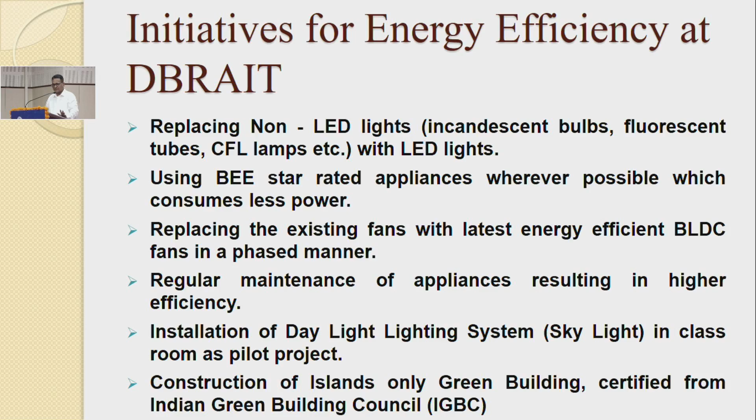And another thing is we have constructed a building, the first green building, awarded by IGBC, Indian Green Building Council. There you will get all natural light. Airflow is there, air circulation is there. We have not installed a single air conditioner there. With the help of fans, we are comfortable in the classroom. Next.

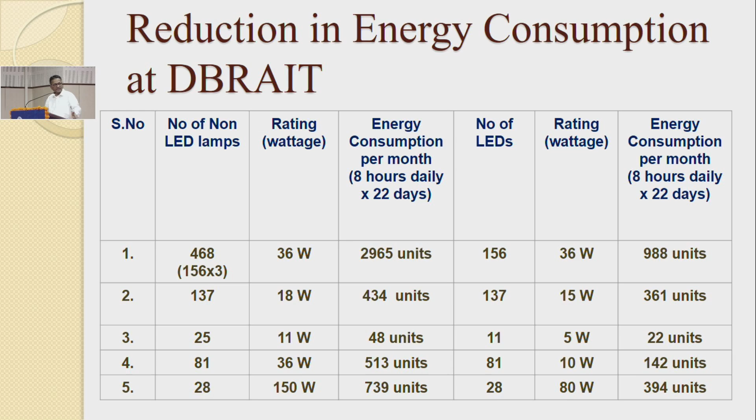This table shows reduction in energy consumption at DBRAIT. So this many lamps we replaced with LED lamps. Next. So we have replaced altogether 936 lamps with LED lamps, and total saving per month in energy consumption is 6,317 units. If we multiply with the tariff rate, we are saving 90,000 plus amount per month. Next.

Solar panels. In all our buildings, wherever the structure is supportive, we installed 4 solar panels, and 2 panels are under installation in the Mechanical Building. Next. Yes, this is the calculation, sir. Energy generated through solar panels. I have taken the readings of 4 months, March to June,

and through solar panels we have generated this many units of energy, and our institute consumption I have noted down. You may find we are almost self-sufficient to produce energy, but these panels were installed by a private party, so this benefit we are not getting. Later, if we install our own panels, we will be self-sufficient in energy also.

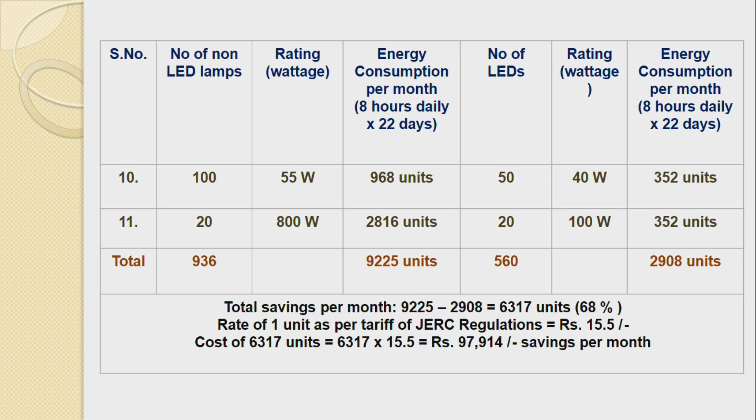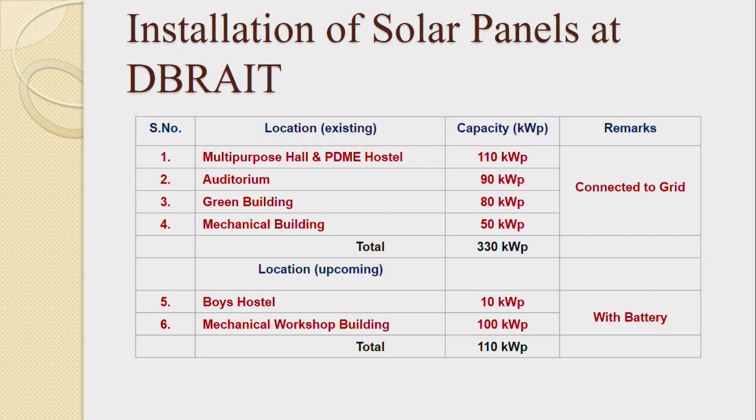Secondly, there is a 330 kilowatt rooftop solar plant, I think, sir, which is generating around 6,000 units per month, saving around a lakh rupees of bill. Yes, sir, around 97. Is it meeting 100% of the power of your whole institute? The monthly consumption of the whole DBRAIT institute is only around 19,000. Next slide. This one, 19,000.

So only 18,000 units are consumed by DBRAIT per month in total, excluding residential, sir. Hostel is included in this figure, workshop, academic classrooms, all included. Everything is included because that data we get from the electricity bill, sir. Okay, that is very good.

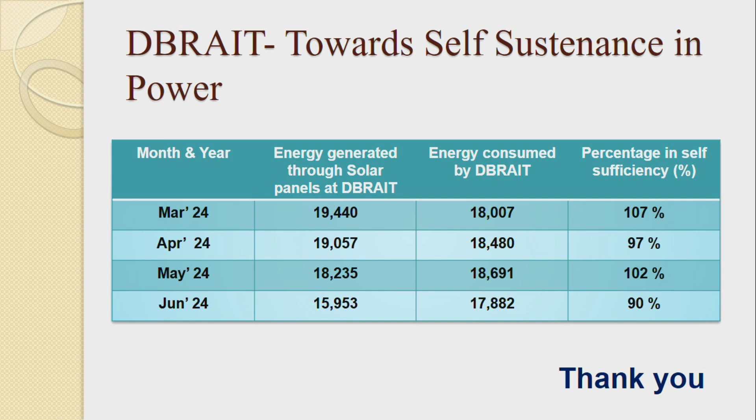If you could give us some data sometime regarding the total saving vis-a-vis earlier consumption and after your energy efficiency measures. Yes, sir. Thank you. And we'll calculate, sir, the per student energy consumption you mentioned, and we will see what it was earlier. Thank you, sir.

After classes are over, all the students leave like that, lights are on, ACs are on. You can't have any centralized control. Nowadays CCTV is there. We have installed CCTV. Through CCTV also, that is one of the ways. If you made the connection like that, we can control from the CCTV room also. After seeing nobody is there, we can switch off. Yes, that's a good suggestion.

Yes, you are telling that a lot of energy gets wasted because even when the classes are over, the lights are on. Initially we have installed a moving sensor in one of the classrooms as a pilot project. So your suggestion is also good. If the person at CCTV is seeing all the things, he can control from the CCTV room itself. Yes. Thank you, sir.

Good suggestion. Students, I am inviting electrical students at least. Mechanical, electrical students are there. I am within the time frame, na, Sajita? Exceeded. Okay. Thank you. Thanks a lot. Thank you, sir. Shankar sir, your talk has set the tone for the event. Thank you very much, sir.

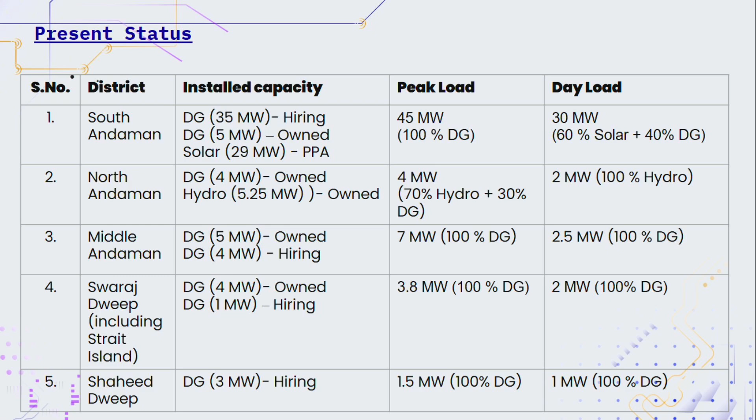All the rest of the islands are fed by hired or departmentally owned DG sets. We don't have any renewable energy source as of now in the remaining islands. Like Swaraj Dweep, we have owned DG sets and hired DG, and the peak load is 3.8 megawatt and the day load is 2 megawatt. In Little Andaman, including the Dugong Creek area, installed capacity is 3 megawatt, peak load is 2 megawatt, and day load is 1.5 megawatt. In the Nicobar group of islands, Car Nicobar, Teressa, Chowra, Kamorta, Katchal, Champin, Campbell Bay, the installed capacity totals 8 megawatt, and 100% of peak load and day load are met by DG only. In addition, the electricity department provides power supply to the tribal hamlets in Great Nicobar.

Point number 8, we are providing power supply to the tribal hamlets in Great Nicobar Islands and Nancowry group of islands also, and some isolated pockets at Bangaon, Hanspuri, Rutland, Smith Island, like that. The Smith Island is in Diglipur, North Andaman Division. These all are fed by 100% DG power supply.

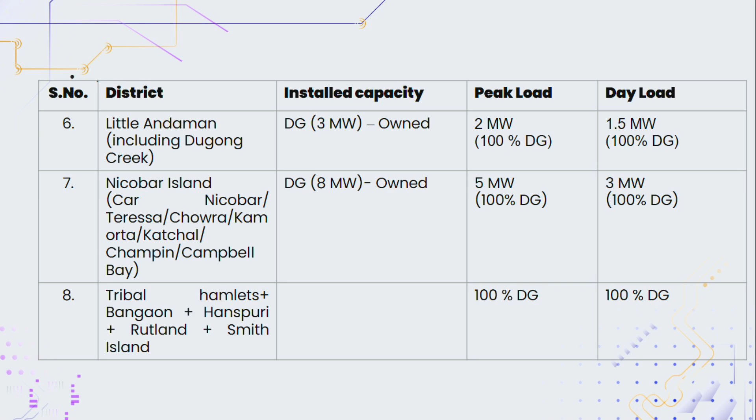As we can see, all these islands are running on standalone mode, and a dedicated management is required to maintain and run the generation and transmission system for providing reliable power supply and services to the consumers. Of course, there are many challenges, but broadly we will look into some of the major issues, as the power base significantly relies on hiring powerhouses at different locations in South Andaman with operation control on private entities. Remote monitoring and supervision of these power plants for synchronizing into the system by the department is a major concern in the absence of an integrated auto control system.

As the power base significantly relies on hiring powerhouses at different locations in South Andaman, supervision of these small power plants by the department is a major concern due to the absence of an integrated auto control system. Frequent variation in power output from the existing solar power plant due to cloud movements and intermittent solar irradiance has hugely impacted the South Andaman grid, leading to major power disruptions in Port Blair and adjacent areas. This grid instability is only because of the absence of an adequate storage solution to absorb the solar output variations from the 20 megawatt NLC power plant.

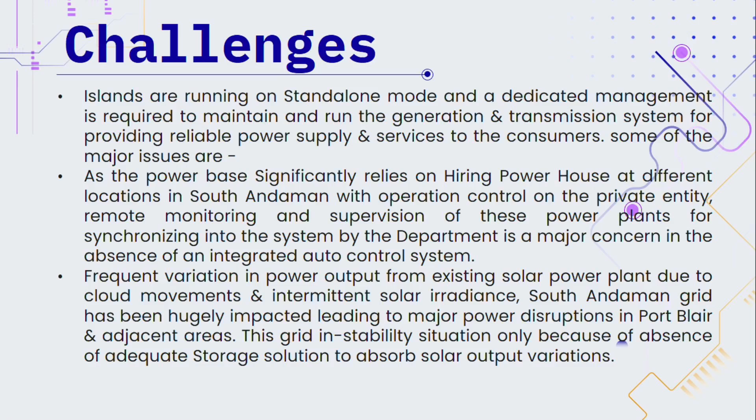Apart from this, the available power infrastructure for transmission and distribution is mostly in dilapidated and old condition, and most of it is running beyond its service life. So, frequent system deficiencies are encountered and their maintenance and repair requires considerable time, and hence restoration of power interruptions due to line faults in the affected zones takes longer. The department has not expanded over 4 decades, and therefore the present organizational setup is not commensurate with the increased consumer base and power demand.

Power availability is largely based on several DG sets running together, so breakdown of any DG set results in power deficit leading to load shedding, as the situation always remains hand to mouth and is not able to mitigate any contingency. Lack of awareness in consumers on judicious utilization of power makes the demand side management plan a failure. The main reason for the present power crisis at South Andaman is the drop of the 50 megawatt LNG project envisaged to be commissioned by 2022.

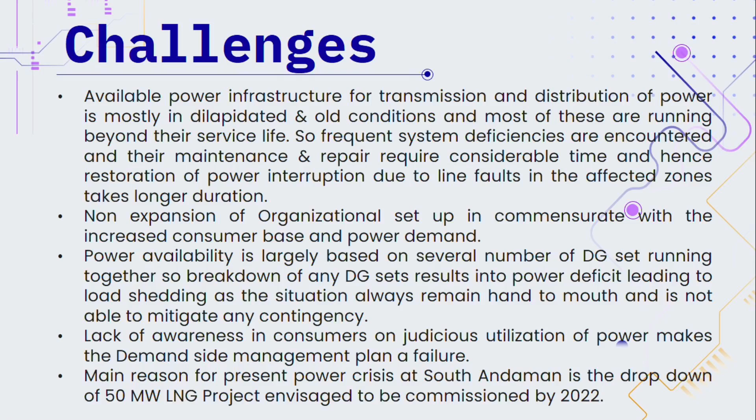There are numerous steps being taken by the Andaman and Nicobar administration to tide over the crisis, which include many power projects and other plausible solutions. We will delve into some of the future power projects and distribution infrastructure which are also in the pipeline. Under the scheme Greening of Islands, Andaman and Nicobar Islands is envisaged to establish solar power projects in all the major islands. The first one is a 118 megawatt ground mounted solar project to be established at Mithakadi, and then Stewartganj, Swaraj Dweep 3.8 megawatt, Little Andaman 5.7 megawatt, and other Nicobar group of islands totaling 10 megawatt.

The solar projects are adequately combined with battery energy storage systems of corresponding size and capacity. The Andaman and Nicobar administration is working with SECI for finalization of land and other approvals and clearances for establishment of these plants by 2026. This would enable transition from conventional projects towards sustainable power solutions, aiming to enhance the energy security of these islands. It will also contribute to our commitment to achieve net zero in the power generation sector.

Under this, the next one is saturation of rooftop solar. Saturation of rooftop solar in all government and residential buildings has been mandated by the Government of India. As per the directives, all feasible government and residential buildings are being considered for installation of rooftop solar. SECI has been roped in by MNRE for implementation of 30 megawatt rooftop solar in residential buildings. And NVVN has been assigned, and they are in the process of floating a tender for 3.45 megawatt rooftop solar in government buildings.

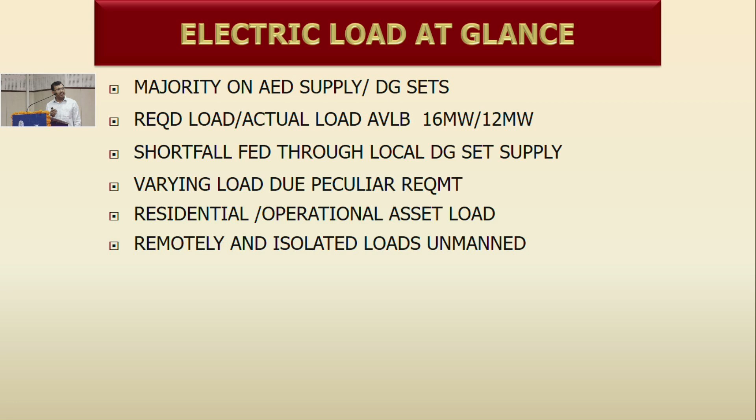So we have got the state electricity department supply, then we have got a standby DG set, then we have got other DG sets. So you can understand the requirements for the defense are peculiar, and most of the loads are located in remote and isolated places. And seeing the peculiarity of the stations, some of the loads are unmanned. We have to be dependent on the sensors which have been connected with them.

We have got some areas of concern. We have got frequent breakdowns from the state electricity department because of their distribution network. They have got a poor distribution network. I hope they will be improving it. Mostly the type of generation is captive DG sets. A lot of voltage fluctuations are taking place, and because of these voltage fluctuations, a lot of equipment is getting damaged.

And you can imagine the cost of the equipment as far as the operational equipment is concerned. So we can't compromise on these voltage fluctuations. So we have installed our HT voltage stabilizers in-house.

The fuel efficiency of the captive DG sets is the major concern. Most of the DG sets are very old vintage, and some of the DG sets, because of the varying load requirements, are either running underloaded or sometimes become overloaded. So the fuel efficiency of the DG sets gets compromised. The major challenges are in manning and operation of our DG sets at the remote locations, though all these DG sets are connected with AMF, auto mains failure.

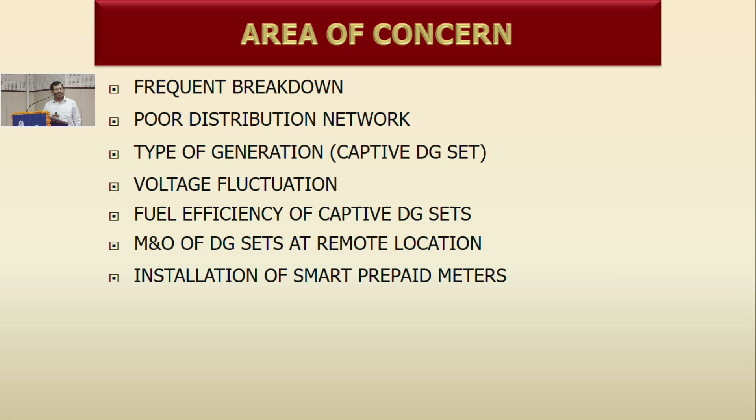Then, most of the electric load requirements are unmetered because of the operational requirements. They are not connected with a meter, so nobody is taking care of the electric consumption. Except the residential loads, all these operational loads are unmetered. So people are not taking care of that. I will tell you what steps are being taken, because we can't compromise on this. This I have already discussed.

Then high tariff rates, what we are getting from the state electricity department. Another challenge is fuel storage capability. Whatever DG sets we have, where do we store the fuel for the DG sets? Then non-availability of skilled manpower is a major concern. When one DG set goes off-road, getting it repaired is a major task. The guy has to come from the mainland to get it repaired.

Subsequently, maintenance is also a big challenge. That's why we have got standby DG sets to standby DG sets. One DG set requires at least 3 to 4 months to get repaired. Then most of the equipment has now got outdated, so we are working on it. We have got this specific concept of declaring it BER. First it gets declared BER by the technical board, then another work gets sanctioned, and then subsequently it gets replaced.

But we can't compromise, so some of the DG sets we found getting declared unserviceable within 10 to 12 years of life span. Then we have got a spare part shortage. So these are the challenges which we are facing. In fact, all these repairs and other things we get outsourced. We basically hire contractors, we go for the bidding. And the L1 bidding concept, we all know the problems we are facing. The L1 bidder comes up, he quotes, and then subsequently he disappears.

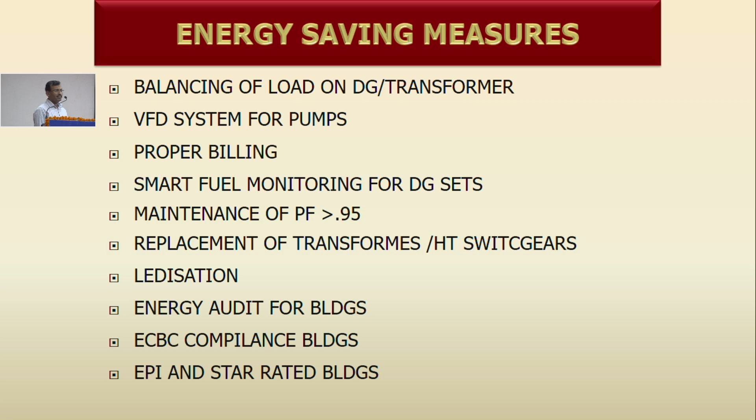The feasibility study of OTEC, Ocean Thermal Energy Conversion, where we are seeking an opportunity, has very high potential. In Lakshadweep, we have understood that the Government of India is going to set up 100 kilowatt plants. So for OTEC also we are seeking an opportunity. If anybody has this expertise, we will go for the consultancy. Recent research has shown 10 megawatt capability in Andaman and Nicobar itself. If we can tap this energy, it will be a major boost. EV vehicles: most of the government vehicles are going to be EV.

So what is the way ahead? An integrated and stabilized grid, which is the need of the day, and national grid connectivity through undersea cabling arrangements. I attended one G20 seminar where it was said this is the major requirement for the Andaman and Nicobar Islands. Whatever we say about renewable energy, the major requirement is national grid connectivity, and the Ministry of Power and everybody is in consultations. Grid connectivity from the mainland to Singapore is going to come up, and it is going through our Andaman and Nicobar Islands.

So hopefully this national grid connectivity will solve our entire problem, and this is the actual requirement for the energy needs of Andaman and Nicobar. This will be done by 2030; by 2030 we will see national grid connectivity. Use of floating solar photovoltaic cells, we can think about this. Dhanikhari Dam is another place where we can go for floating solar photovoltaic cells. It is very effective and very efficient. We have installed it at CME Pune and it's functional there. An LNG based power plant is another option.

Solar wind hybrid system; since we have less time, I will just rush through. Installation of large scale OTEC power plants, for which we are seeking consultancy. Use of biomass to generate renewable electricity and cooling. These are all conceptual things; ultimately they will see the light of day. Then battery storage is the major concern. Whatever solar power you receive, there should be better storage capability. The latest technology is iron chromium redox flow battery technology for storage. Here also we are going for consultancy. Hopefully that will also see the light of day.

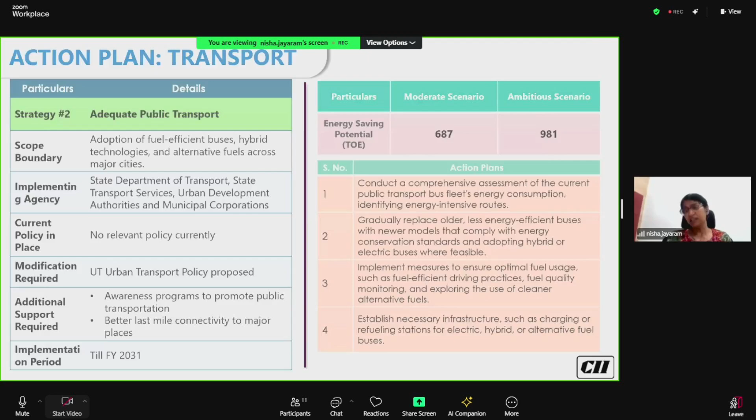The third thing we looked at was, while road transport is one part of it, Andaman Islands being an island has a lot of maritime transport requirements. So ships and boats that go between the islands and the mainland, they also consume a lot of fuel. One of the things that is getting done internationally at ports is that ships which are docking, be they passenger ships or freight and cargo ships, they may be provided a power supply from the shore rather than burning diesel, which is a lot more precious and which results in a lot more emissions directly from the ship.

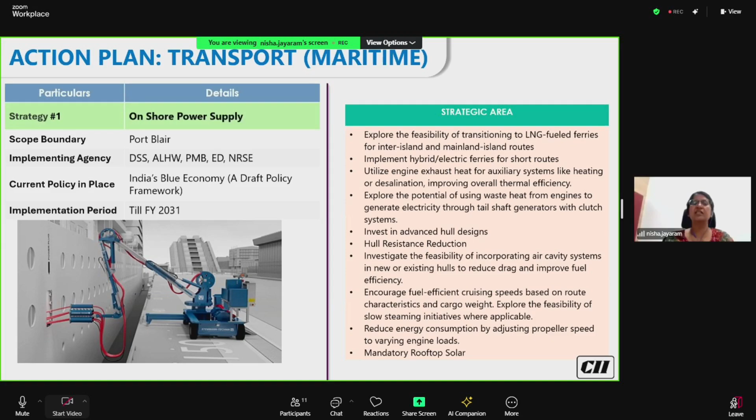So this is something called onshore power supply, and this is something that's used internationally, and you will also find this being used in a lot of airports in India, so that airlines don't use aviation fuel. A similar thing can be done with ports as well, and we would encourage the Andaman government to consider this. This will also result in significant emissions reductions from the maritime sector.

The second thing that we also wanted to talk about when we talk about transport and maritime, when you consider cargo ships, etc., there is a lot of time spent and a lot of energy spent loading and unloading cargo from ships. So how can all of the equipment that is used in ports for loading, unloading and other activities like cleaning, etc., be made energy efficient? Because a majority of the forklifts, a majority of the cranes, etc., currently run on diesel.

So one, using more efficient equipment, and second, transitioning all of these equipment to electric as well. So these days, many of these equipment, for example, cranes and others, are available in electric form as well. So we would encourage the government to consider these activities.

The next thing that I want to move on to is buildings. We just heard that residential buildings contribute significantly to energy consumption. So do commercial buildings. So one of the suggestions we have is to notify something called Eco Niwas Samhita, which is an initiative by the Ministry of Power, the Bureau of Energy Efficiency, as well as ECBC, which is the Energy Conservation Building Code. So ENS, Eco Niwas Samhita, is for residential buildings, while ECBC, Energy Conservation Building Code, is for commercial buildings. So the UT needs to necessarily notify this.

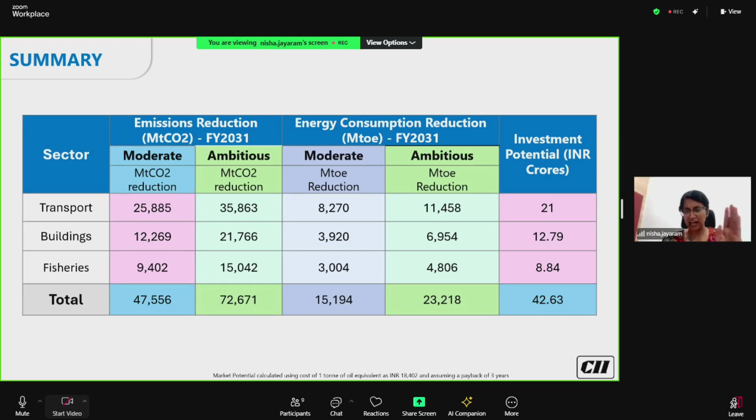But before I close, I would just take a moment to talk about what we do here at the Green Business Center. Essentially, we work across a whole spectrum of areas and activities through which we try to reduce the impacts of climate change in India. We work with industry, we work with government, we work with a whole lot of other stakeholders around the country. So we house the Indian Green Building Council, which currently has almost 12 billion square feet. It's a huge number, 12 billion square feet of registered green building space in India. This is the second largest footprint in the world, actually, after the United States.

We then have something called the GreenCo Rating System, through which we work with industries around the country to enable them to reduce their overall environmental impact. So this talks about everything from energy and carbon emissions to water management, waste management, understanding impacts of the products on the environment, managing end of life of products, and so on and so forth. It's a very holistic framework that is used to encourage companies.

We have an eco label called the GreenPro Eco Label, which gives people the choice to buy green products. We have an energy team which works extensively with Indian industry to help them improve energy efficiency and to help them reduce their carbon emissions. And finally, we also work with a variety of clean technology entrepreneurs to help them become bigger and to help industry access some innovative technologies.

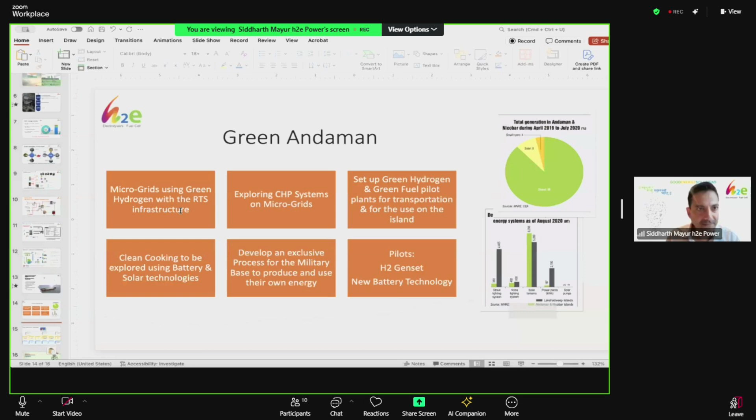Is my screen visible here? Yes, sir. Thank you.

So I represent a company called H2E Power. We are in the green hydrogen, fuel cell, and the net zero ecosystem as a business. We are a 14-year-old company, completely developed and made in India, like I call it.

What I'm going to talk about today is more about the electrolyzer and the fuel cell technologies and how hydrogen is playing a role on the global scale in energy efficiency and carbon emission reduction, and also making us more and more independent. So for me, the bigger story is energy independence and energy security. The green comes as a very potent byproduct of whatever we are doing.

But today for India, and I always say this across the world, for us the bread and butter is the key issue. Green definitely is important, but it's not the primary issue for us. We have to make sure that we get 24/7 energy, and when I say energy, it is not just electricity, it is also the fuels that we use.

So if you're looking at how hydrogen works, or what hydrogen can do, or the industries where we look at hydrogen being utilized either directly or indirectly, for production of green hydrogen today we look at two different ways. One is the biogenic route, which I will not be talking a lot about today, but I will speak about the route from the electrolyzer, which is through splitting of water.

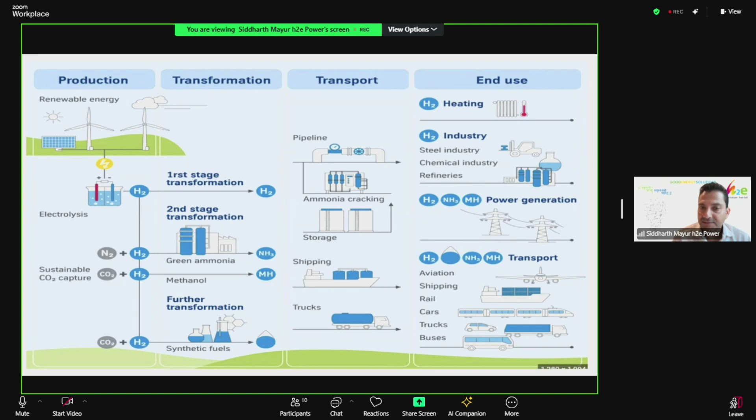So the key applications again for hydrogen would be power generation and heat generation. So when I say heat, we generally use the fuel cells. If you are using hydrogen in a stationary purpose for electricity generation, then these are combined heat power systems. And when I say heat and power, for every kilowatt hour of power that it produces, we produce 1 kilowatt hour thermal equivalent of heat. And that heat is a very good quality heat. We bring heat at about 250, 300 degrees centigrade, which can have multiple uses.

One of the uses, of course, can be for cooking and toilet applications, bathing and cooking. But the other application is to convert this heat into cold air through absorption chilling, and that can take care of all the air conditioning needs. And this again is a 24/7 process. So as long as the sun is shining, as long as there is water available, we'll be able to produce this. And that can not only greatly reduce the pollution on the island, but will also give a 24/7 feel to everything. So whenever we're talking about a solution on hydrogen, we always talk about 24/7, clean, green, reliable, and affordable. So powering buildings, powering smaller places.

Now again, the fuel cell technology is scalable, right from a 1 kilowatt system to a multi-megawatt system. The efficiencies don't vary a lot. Of course, the capex varies because on 1 kilowatt, the capex is a little higher. On a megawatt, it is lower. And these are best suited for distributed generation. They work on efficiencies of close to 60-65%. So they are one of the most efficient devices. If you take the combined heat power efficiency, we are talking about 92 to 93% efficiencies.

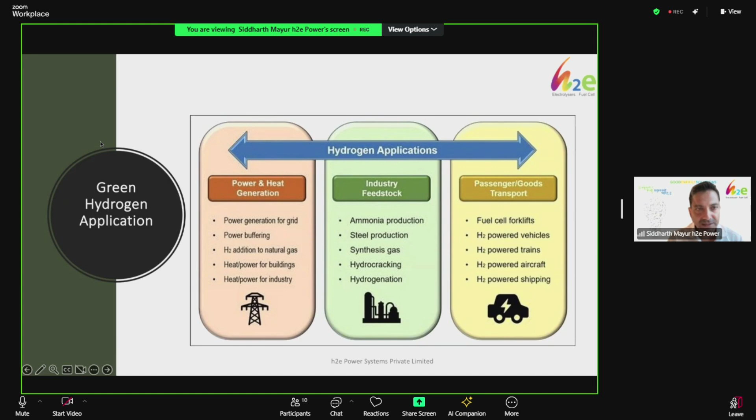The last area that I have been very focused on is transportation. Whether it is internal transportation on the island, you use forklifts or you have three-wheelers. We just heard that there are a lot of EV buses coming into play. To provide charging infrastructure for these EV buses, hydrogen can be used to produce distributed scale AC or DC electricity to charge these vehicles, or even provide hydrogen directly if you have hydrogen buses. We already have close to 20-25 hydrogen buses in India running in different places, right from Assam to Leh Ladakh, Delhi, Gujarat. So this is definitely worth a try for the Andaman Islands. Three-wheelers on hydrogen, buses on hydrogen, and also ships on hydrogen. So refilling of those ships can also happen.

This is a little snapshot of what the National Green Hydrogen Roadmap is. So we are talking about a huge opportunity that is coming into play with an investment of close to 8 lakh crore rupees, which is expected by 2030 in the country, and the benefits of which are going to be on the mainland as well as on the islands that are part of the Indian Union.

And the government has sanctioned already 19,700 odd crores, out of which, like I said earlier, some of these projects are already on stream and they would be live in the next couple of years. My company has been one of the PLI winners on the electrolyzer manufacturing. So we are all working towards making this whole concept of hydrogen Atmanirbhar, make it in India and provide at a better price to customers in India and across the world.

The targets that we've already spoken about, and these are, I think, very important dates which all of us should memorize and remember. So 2030 is when we as a country would announce that we have arrived on the hydrogen or the net zero ecosystem. And that includes all the areas that I have spoken about. There is a lot of work happening on that.

By 2047, we are talking energy independence, means that the $200 billion that India spends today to import energy will probably become zero, and we will spend all of that money within the country. So that's the level of opportunity that we are looking at and the level of solutions that we can implement within the country. And 2070 is net zero. 2070 looks very far, but it's still a very steep target to reach net zero as a country by 2070. If we are able to achieve that, I think that will be a big achievement as far as the world is concerned.

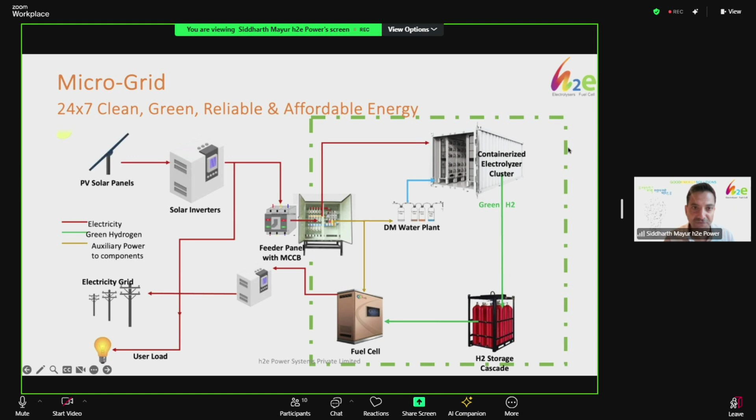And these microgrids we have already demonstrated in India at various locations, whether it is a small home or an office or even a microgrid at a power station at NTPC, for example. These microgrids are very prevalent in Europe. My company has been very proud of the installations we've done here. About 600 of those installed in Germany and working for the last 10 to 11 years, working with very high efficiencies.

So this again is a concept that we are promoting in India, for the charging infrastructure for electric vehicles. See, today we are all using the grid to power our electric vehicles, which is a good thing. But if you really look at the carbon emission side, we are emitting more carbon doing this, because it is always well to tank and tank to wheel. So tank to wheel we are green, but the well to tank is coming out of the coal grid or

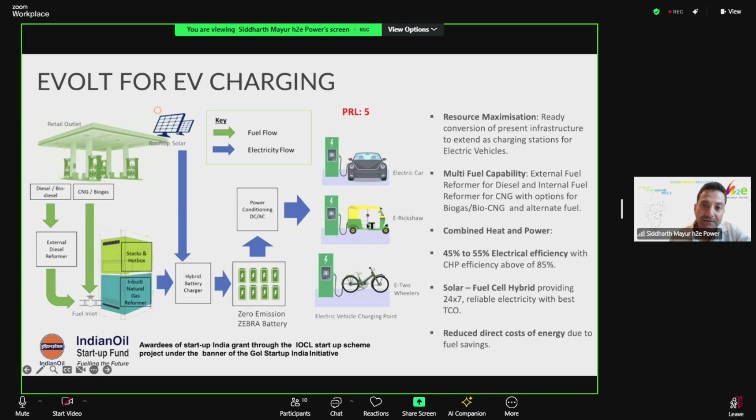the gas grid. And here we are talking about a distributed grid where you have a small 20-feet container which has a solar fuel cell battery hybrid system, and you can place it anywhere and it uses biogas as an input. So it can charge electric vehicles and provide for greener infrastructure, which again I believe can be a very potent solution which is worth a try on the Andaman Islands.

The last but not the least is the transportation segment, and this is something that, like I said, has been demonstrated in India and has a large potential. We are also exploring potential right from the Brahmaputra basin up to the inland water transportation for passengers as well as for cargo. And because for the Andaman Islands the only mode of transport to and fro the island is through water, pilots on the ships or catamarans using hydrogen can be very effective. It would not only save on the carbon, but would make it much more efficient.

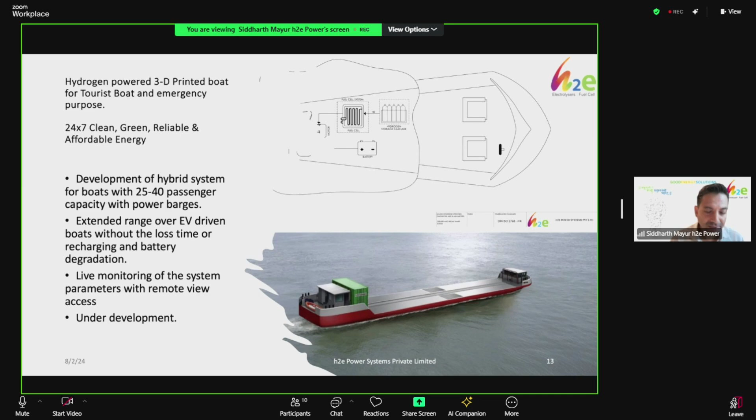And if you're talking a comparison with an electric boat and a hydrogen boat, the efficiencies you can get on a hydrogen are much higher. And we always talk about a hybrid. We never say that it is pure hydrogen. We take a battery and a hydrogen hybrid, and that's how it works. And the refilling time, of course, is very, very low. So this I think is a very important solution for the Andaman Islands.

And to end my presentation, I just want to put some thoughts to the minds of people here in the audience, people who are decision makers and people who also can help us implement these projects on ground. We really should look at pilots where we go with the microgrid using green hydrogen with the current or the upcoming rooftop solar infrastructure. And I believe this can really make a big difference between becoming energy independent and leaving that small gap where you still need external energy.

To explore the CHP systems on the microgrid, where we can capture the heat and actually start also producing cold air. These are again mature technologies. When I'm talking about absorption chilling, it is a mature technology for 50 odd years, and this can be easily installed, that can be very easily demonstrated there.

We should look at setting up green hydrogen and green fuel pilot plants for transportation, especially for waterways, but also for inland transport. So if we can look at a couple of buses running on hydrogen, a couple of three-wheelers, or these golf cart kind of minis running on hydrogen, that could be a good project to look for. Again, the emission from the hydrogen vehicles is just water, so it really is not a concern to the environment. We can always collect that water and recirculate that water to produce further hydrogen. So it can always be looked at from that angle.

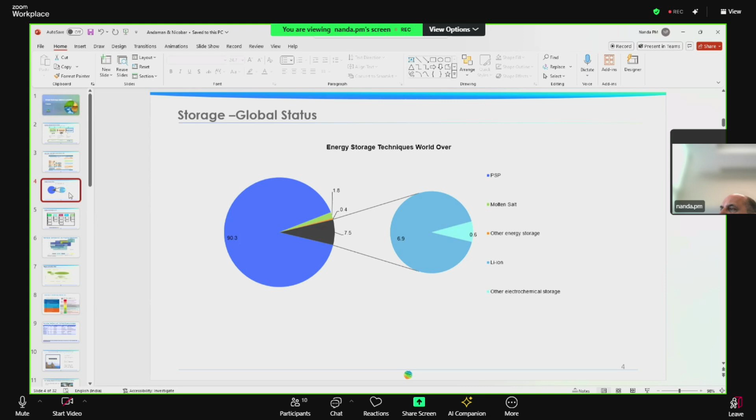Just a brief on the technology which we have as on date. We have a lot of technologies, mechanical, electrochemical, thermal, electrical, chemical, which are presently in contention, and a lot of R&D is going on in each technology to make them workable, make them economical, make them viable.

But more or less two technologies, pump storage and on the electrochemical side the batteries, various combinations of batteries, lithium ion, sodium nickel, vanadium redox, etc., are going on in development. And very soon we'll see the large scale development of these, making it a viable option also. Maybe another 2-3 years down the line, we'll be seeing more of the batteries coming up in a big way.

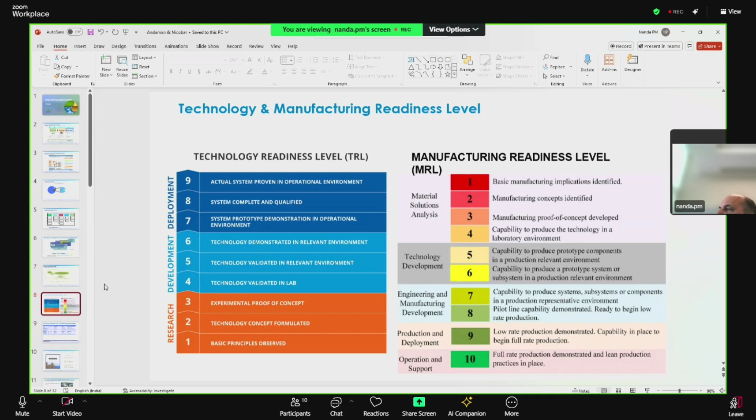And there is another part when we come to the technology readiness and manufacturing readiness of these technologies. We have scales from 1 to 9 for technology readiness and 1 to 10 for manufacturing readiness. And when we analyze all these technologies, we find that pumped storage, as of now, from the technological and manufacturing readiness, is the technology which is available and which has been in use for the last 67 years.

Sorry to interrupt. Kindly put it on presentation mode. Okay. Thank you, sir. Yeah, I think it's clear.

So lithium ion batteries, we see that they are also technologically fully developed now. Manufacturing scale on the commercial level is going on very fast, and we'll be achieving that.

Sir, it's still not on presentation. It's not visible? It's visible, but it's not on presentation mode. It is on presentation mode. Let me see how it is going on. Yeah, kindly make it a slideshow, sir. I've done that only. From my side, it is being shown like that only. Is it now? No, sir, not yet. To me, it is showing in slideshow mode only. I don't know how it is happening. Now I've compressed it, but earlier it was showing a slideshow only.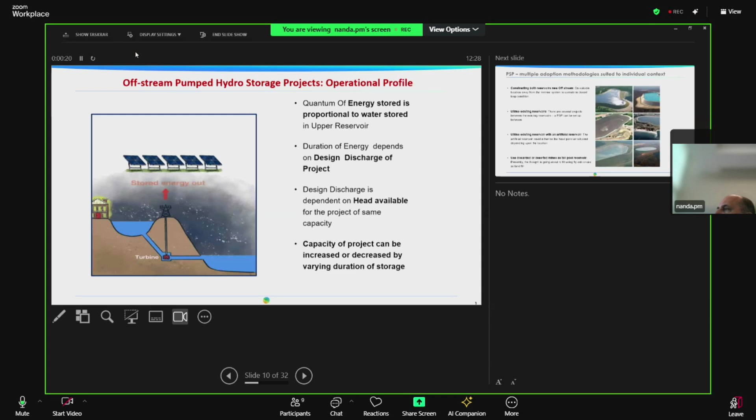He's sharing wrong. Yes, sir. Now? Is it sharing now? Yes, but is it not visible clearly? Actually, you are sharing the wrong screen, sir. Just stop sharing and share it again, sir. Okay, stop sharing. Is it visible now? Yes, but we are on the same screen, sir. It's not coming on full screen. Sir, please press F5 on your keyboard. F5. I don't know why it is not coming.

Your screen sharing, it's showing here. No, I don't know what is happening. No. Not visible? What is it? Yeah, what is visible on the screen? Yeah, it is visible, sir. Slides are visible, but not on the presentation. So slides are smaller, so it's not readable actually. Some problem with the sharing. Run full screen. No problem, sir. Please carry on, sir. Please continue.

Okay. Thank you, sir. So we see that at the technological and manufacturing level, both technologies are fully mature. Now we come to the pump storage project. Pump storage projects are basically of many types. Some are river based, some are off-river based. Off-river based projects are quite suitable. You can see in the picture that we create two artificial reservoirs. When the sun is shining and energy is available, or wind is available, we pump the water from the lower reservoir to the upper reservoir. And when we need energy, we draw the water from the upper reservoir to the lower and generate energy.

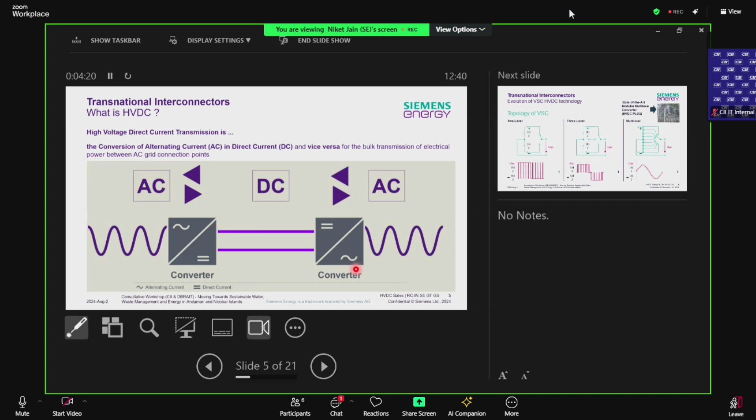Since it's a college, I had just mentioned what an HVDC is. It's basically something that converts AC into DC at high voltage. So the college students might have been interested in this, but as mentioned by the moderator, I'm skipping all this and going forward.

We have done a project already using the VSC technology. It's the state-of-the-art technology in the world today. This is the first and only VSC-based HVDC in operation in India, where we have implemented a link of 2000 megawatt from Pugalur to Trichur using overhead line and underground cables. Some pictures of the site, Pugalur and Trichur. So this is what a converter station would look like if implemented in Andaman.

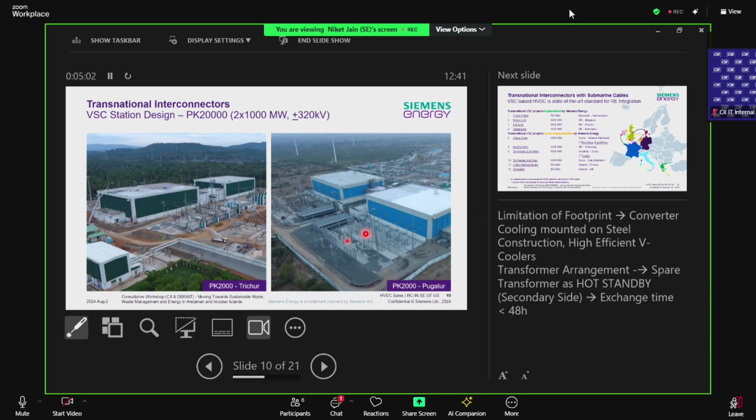A lot of references, so it's not something that we are doing new or for the first time. There are dozens of projects which have been done by us using submarine cable. Some of them are, of course, cross-country. So consider England as an island, Ireland as an island, similar to Andamans, and you can see that there are so many interconnectors built using subsea cables of quite high capacities, going up to 1400. You also have island connectors, for example, Greece to Crete. So this is something like India to Andaman. You have Italy to Sicily to Sardinia, again like India to Andaman, all possible using the VSC.

So I think people are normally interested in which is the largest, which is the longest, which is the deepest. The longest link in operation is currently the Viking project, which we commissioned last year. It has a cable distance of 740 kilometers. Of course, the Andaman Island to Indian mainland is much more than this, but that's not a technical issue.

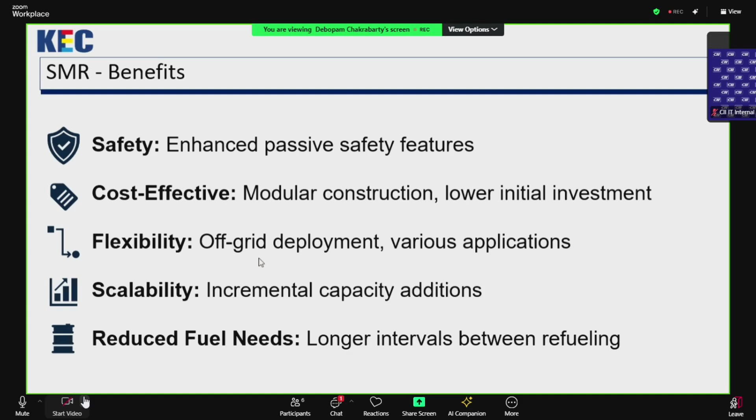It obviously comes with a few challenges. The regulatory challenges, okay, my slide wasn't moving. Right now everything is designed around regular nuclear plants, so we need to make a framework specifically for SMRs. Then there's a public perception, some level of skepticism and concerns about nuclear safety and waste management. So we need to work towards that to ensure that we do not get into regulatory hurdles once we decide we want to do this project.

Now, coming to the interesting aspect: in this 2024 budget, there was a lot of buzz created around SMRs after their mention by our finance minister. The government has allocated funds for the research and development of SMRs, recognizing the potential to enhance the country's energy security and reduce carbon emissions. Under the outlay of major schemes, around 2,000 crore has been allocated for nuclear power projects, with the mention that the majority of it is going towards the development of SMRs.

Secondly, the finance minister emphasized the importance of collaborating with the private sector to advance SMR technology, including setting up something called Bharat Small Reactors, which is nothing but SMRs, and focusing on the R&D of these Bharat Small Reactors. Thirdly, regulatory framework. Steps are being taken to establish a streamlined framework specifically tailored for SMRs, which we don't have today.

The fourth point mentioned was that the government plans to initiate pilot projects in various regions, especially in remote and underserved areas, to demonstrate the feasibility and benefits of SMRs. So here is something the ANI administration can look into, because this is definitely going to start from a pilot stage only, since even the global references of SMRs are still in double digits.

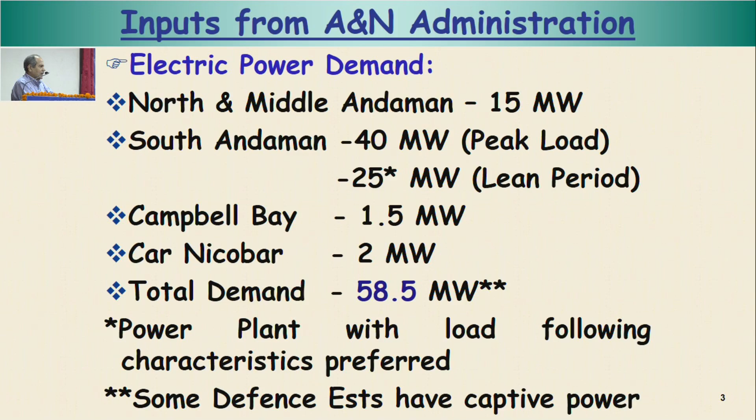And as mentioned earlier, some defense establishments over and above this have captive power. I think 16 megawatts is what was mentioned. At present, all the electricity that we produce here is mainly by diesel generators, as mentioned earlier, and all the diesel is brought from the mainland, and therefore it is expensive.

A small amount of hydropower, 5.25 megawatt, is there. Some solar power is also available, aggregating to a little less than 30 megawatt, as mentioned earlier. But since the weather in Andaman Nicobar is not conducive to solar, and also given the present storage problems of solar energy, the usefulness is limited in this region.

At present, it is surprising to find out that the cost of transportation, cost of diesel, etc., is 42 rupees. That is the actual cost, though it is being sold to domestic users at up to 6 rupees per unit, even less to smaller users. And for commercial use, it is 15 rupees per unit.

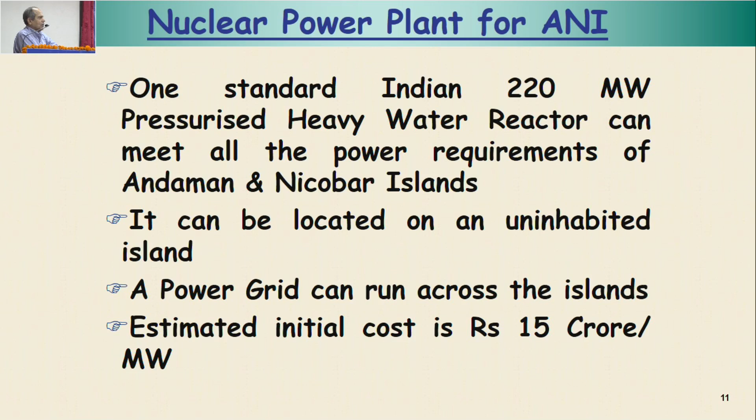But this or any other small modular reactor has some problems in this region. The main reason is that the Andaman Nicobar Islands are close to an active earthquake fault trace, and they are also tsunami prone. That's a big problem not only for this type of reactor, but for any nuclear power plant to be put here.

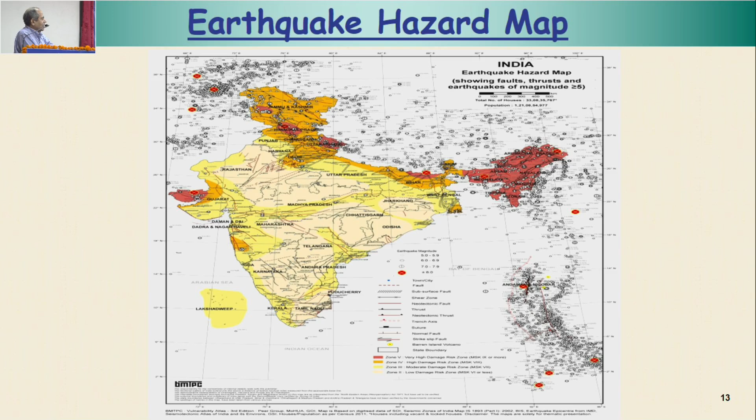This is an earthquake hazard map, and you may notice that earthquakes in the region of Andaman Nicobar have occurred earlier also, and there's an active fault trace just along the lay of the Andaman Nicobar Islands. The epicenter, of course, is a little south, but not very far from the southernmost portion of Nicobar, hence the problem.

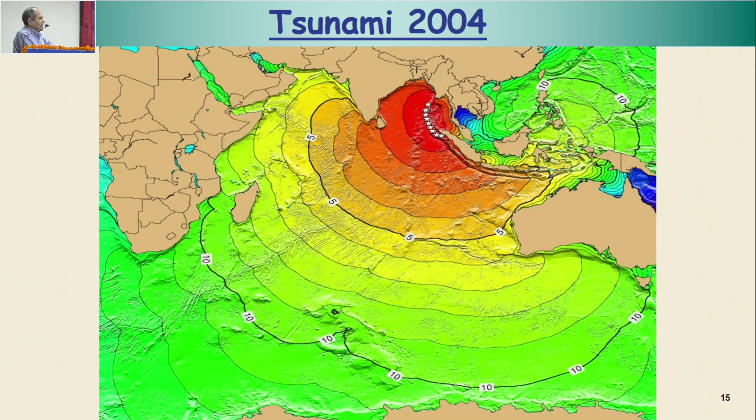The tsunami which came in 2004, this is how it acted out, and it is possible it can happen again. So one has to guard against both earthquakes and tsunamis. Therefore, to set up such a nuclear reactor, the Atomic Energy Regulatory Board will have a lot of difficulty in clearing it.

You may know that in countries like Japan, which are also earthquake prone and also have tsunamis, there are nuclear reactors already functional in a number of places, which have to be hardened for earthquakes. And it's possible to do it. No further technology is required, it's available. But the cost goes up manifold. And even after that, getting it cleared by the present Atomic Energy Regulatory Board will be extremely difficult.

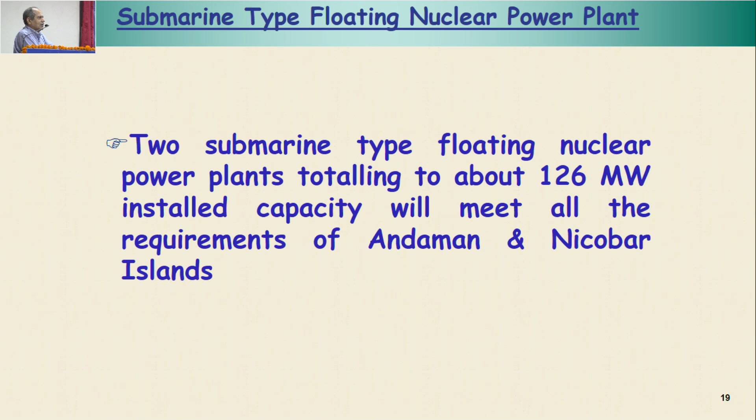What we propose is that we should have, instead of one, two such floating objects, because in case of refueling or any other problem, at least one is available. And their electric capacity, 126 megawatt electric, both put together, can be made available right away. Right away means you have to order it and it will get manufactured. But there is no R&D required at all.

The advantages of such reactors are that they are compact and very useful if floating type, no further development is required, and very importantly, they are totally indigenous, no import content at all, 100% indigenous, and we can go to the same vendors who had done it earlier, so it would be much faster. And as mentioned earlier, it has load following characteristics that will save energy.

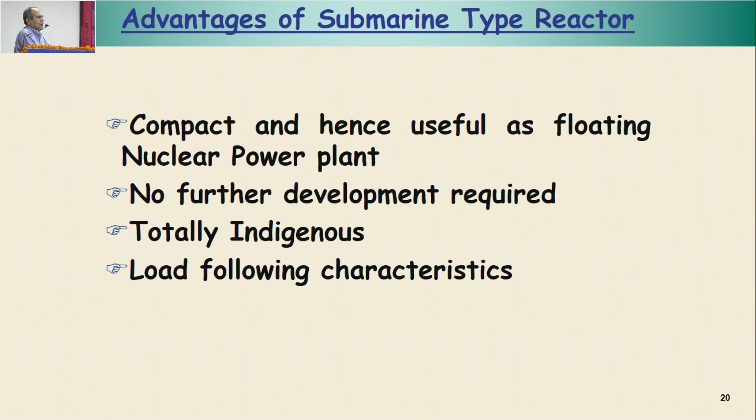But here again there is a problem of cost, only the initial cost. These reactors have been made actually for fighting a war. That means in the submarine, even if there's an explosion nearby, nothing can get affected. The whole thing is costing about 60 crores per megawatt, which is extremely high. When we do it for requirements like Andaman Nicobar Islands, we need not harden it, because it's not for fighting a war. It's only for providing electricity, and therefore the cost will come down from this. But that's only the initial cost.

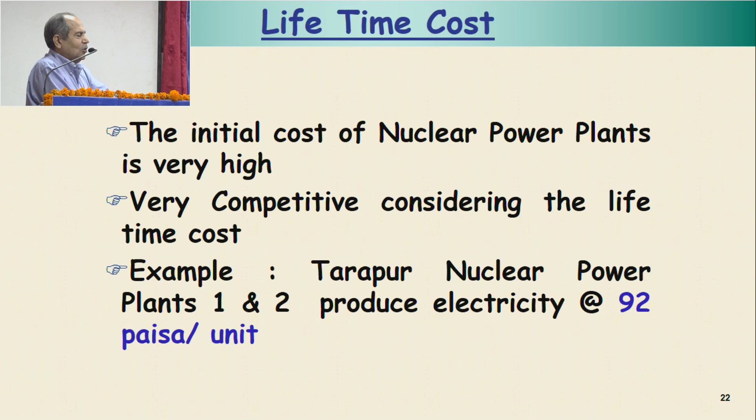Actually, for any nuclear power, initial cost is very high, but the running cost is quite low. That's true for any nuclear power plant. Just to give an example, Tarapur nuclear power plants 1 and 2, which are at present producing electricity for us, the cost of production is as low as 92 paisa per unit. I need not give any more arguments. Even the lifetime cost of the reactor actually pays off as time passes. The life of these reactors is typically of the order of 30 years or more. And in this case, it's not a moving one, so perhaps it will be even more.

So the question being asked is, can nuclear power be harnessed for Andaman Nicobar Islands? Yes, it can be done. But it's a costly proposition as far as initial cost is concerned. And that is why it didn't fructify when these reports were submitted to the government a few years ago. But as mentioned previously, the present government has announced incentives for this. Some budget allocations have been done quite liberally, and they have said that we can partner with private industry.

At present, there's an Act of 1962 which says that nuclear power can be generated only by government agencies. So that will have to be amended. But since it has been proposed by the government, I suppose that will take place. And having got this money for such reactors, I think it is an opportune time that Andaman Nicobar should bid for it, and it will fructify.